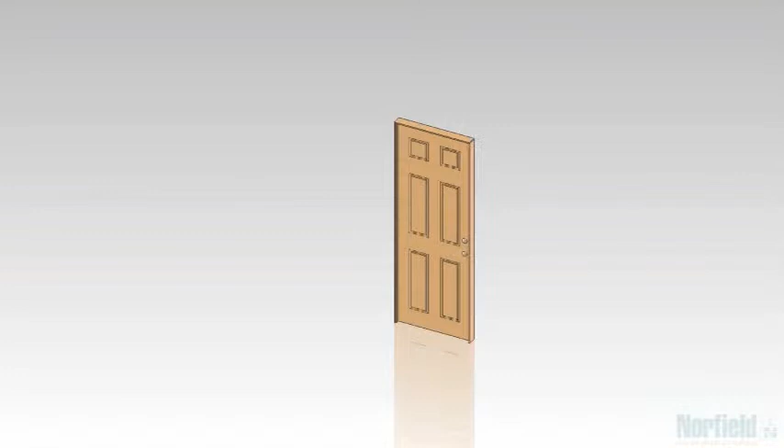To determine the swing of the door, simply face the side of the door with the hinge pin. Note the location of the knob or lock bore. If the knob is to the right, then it is a right-hand door. If the knob is to the left, it is a left-hand door.

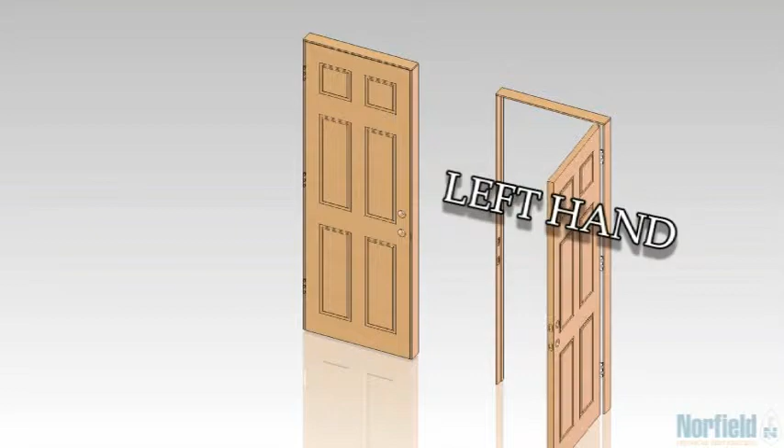The back set is the distance a lock is centered from the front edge of the door. For residential applications, the back set is most commonly 2 3/8 or 2 3/4 inches. For the commercial market, back sets are usually 2 3/4 or 5 inches. Correct back set is necessary to ensure that lock hardware fits the machined door properly.

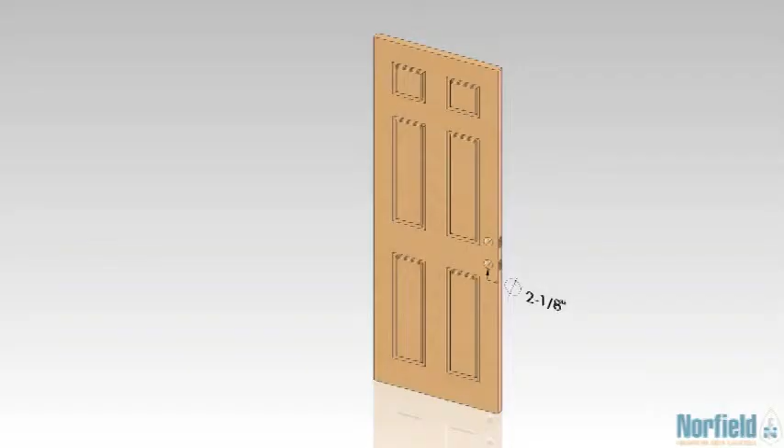Lock bore diameters range in size from 1 3/8 to 2 1/8 inches, with 2 1/8 inches being the most common. Lock height is the distance from the top of the door to the center of the lock bore. For a 6/8 door, the normal lock height is usually 44 or 40 inches. Normal lock height for a 7-foot door is 48 inches. And normal lock height for an 8-foot door is 60 inches.

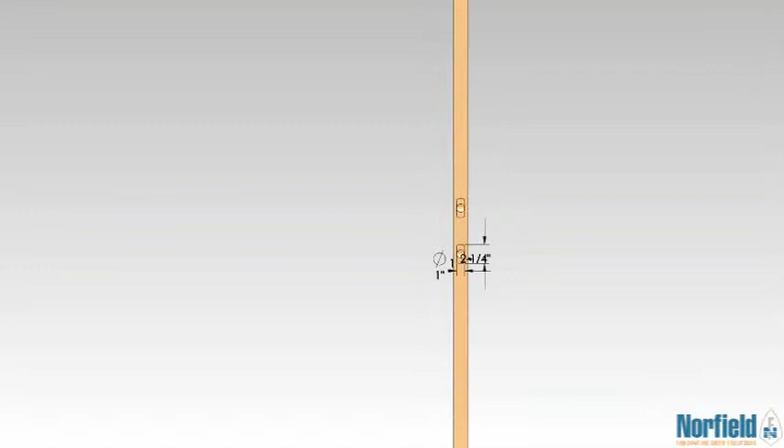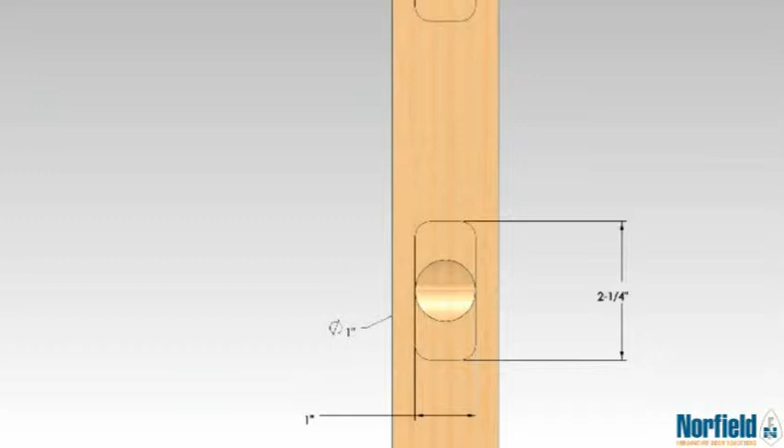The latch bore is a hole drilled through the edge of the door for the latch bolt. It is drilled to the center line of the lock bore and is centered on the edge of the door. Latch bore sizes run from 7/8 to 1 inch diameter, with 1 inch being the most common. The faceplate mortise is a relief on the edge of the door for the latch faceplate. Its width and length will vary with the specific lock hardware used. The most common width and length is 1 inch by 2 1/4 inch.

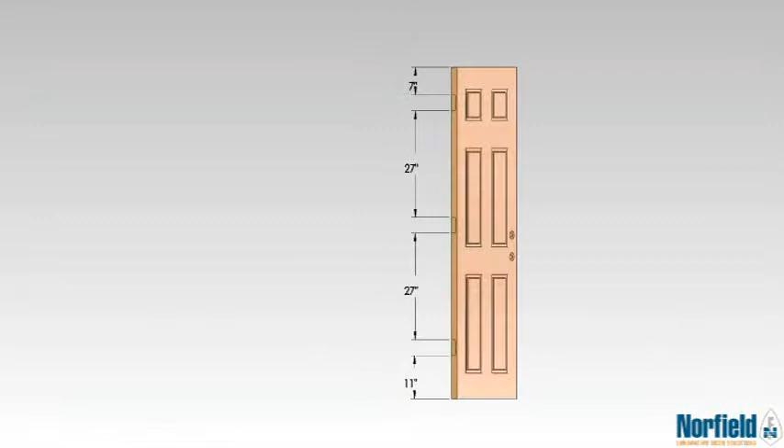The hinge spacing is usually described as a dimension in inches from the top of the door to the top of the top hinge, and from the bottom of the door to the bottom of the bottom hinge. Examples of this are 7/11, 8/8, and 9/9. The center hinge or hinges are most commonly placed with equal spacing between the top and bottom hinges.

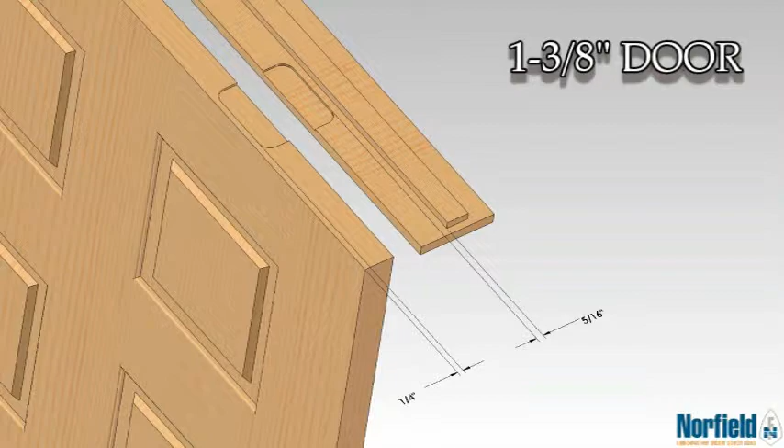Header clearance is the gap between the top of the door and the head jamb when the door is closed. It is usually between 1/16 and 3/16 inch, with 1/8 inch being the most common. For a 1 3/8 inch thick interior door, the mortise is set equal distance into the door and jamb and is typically 1 1/8 inch when using a 3.5 inch hinge. Hinge backset or reveal is the distance from the stop on the jamb to the edge of the hinge mortise, and from the face of the door to the edge of the mortise.

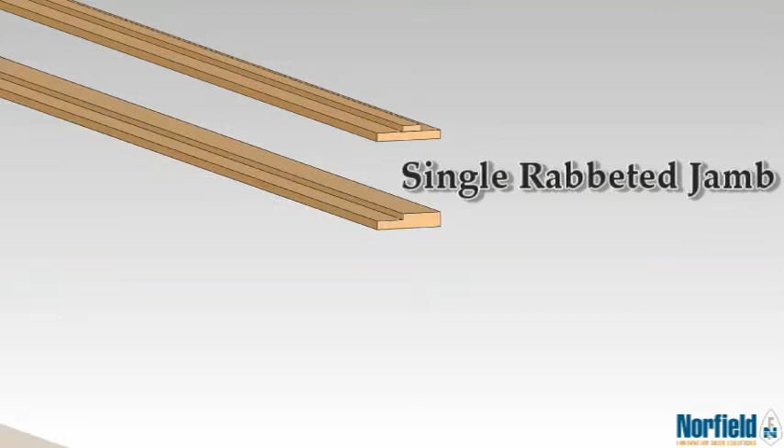In this section, we will discuss the types of jambs. A flat jamb with stop applied, a single rabbeted jamb, a double rabbeted jamb, or a split jamb.

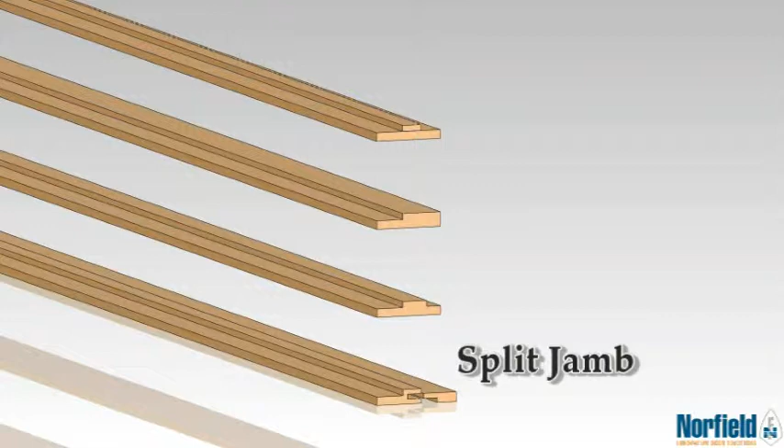Now we will look at how jambs are assembled to form a door frame. A door frame may be assembled with a flat jamb with a mitered stop. If mitered stop material is used, the stop on the side jambs is positioned flush with the dado. The stop on the head jamb is recessed the depth of the dado.

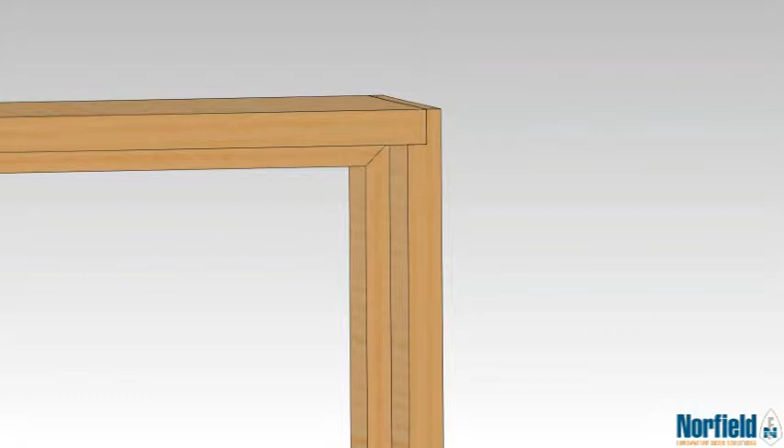Another typical assembly of a door frame is with a flat jamb with a square cut stop. For a flat jamb with a square stop, the stop on the head jamb is recessed the depth of the dado on the side jamb. The stop on the side jamb is recessed the same amount as the thickness of the stop material.

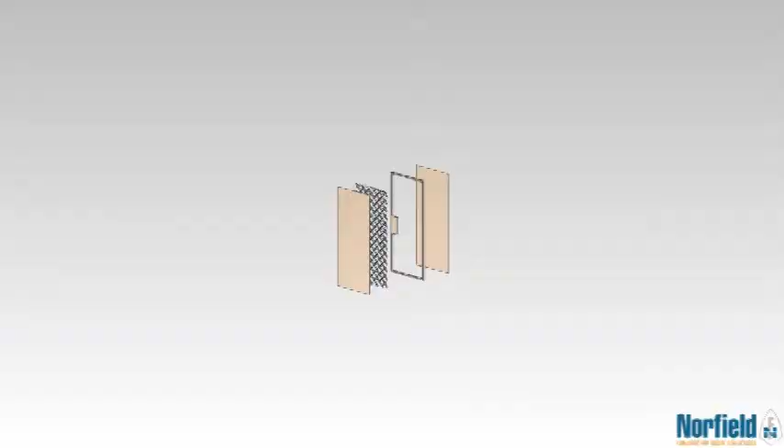There are 3 common styles of doors. Hollow core doors are exclusively used for interior applications. They have a wood frame made up of 2 stiles and 2 rails, a honeycomb cardboard core, and 2 door skins that are usually made from wood veneer or hardboard.

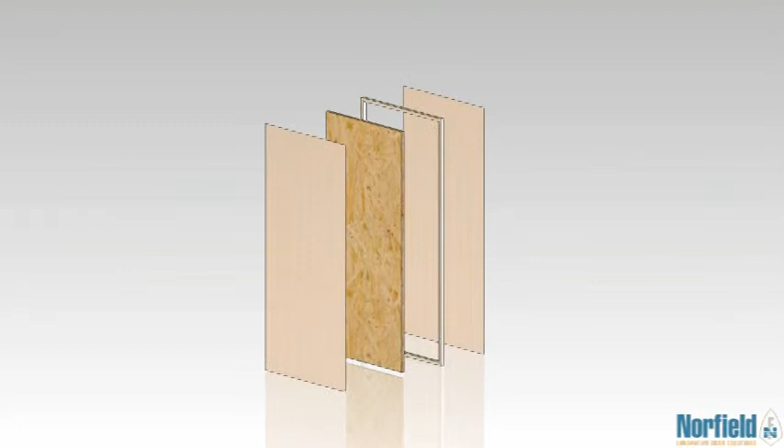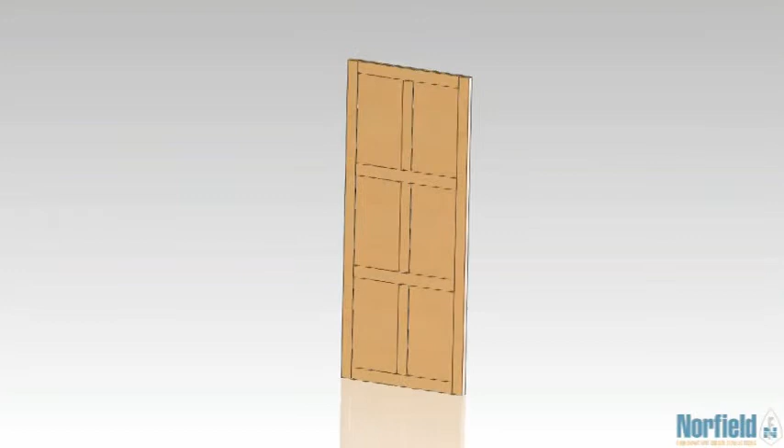Solid core doors are used primarily for exterior entrance doors. The solid core door is constructed similar to the hollow core door. They are made up from a wood frame, a door core usually made from particle board or laminated material, and 2 door skins. A stile and rail door is made up of a number of individual pieces of solid wood that are glued and carefully fit together. Common materials for these doors are Douglas fir, mahogany, and red and white oak.

When a pre-hung door is installed, it is normally trimmed or cased around the edges of the jambs on both the inside and outside of the opening. For interior doors, the trim on both sides of the door is referred to as casing. On exterior doors, the trim on the inside is casing and the trim on the outside is molding. Brick mold is a common exterior molding. Casing and molding are usually mitered where it joins at the top corners.

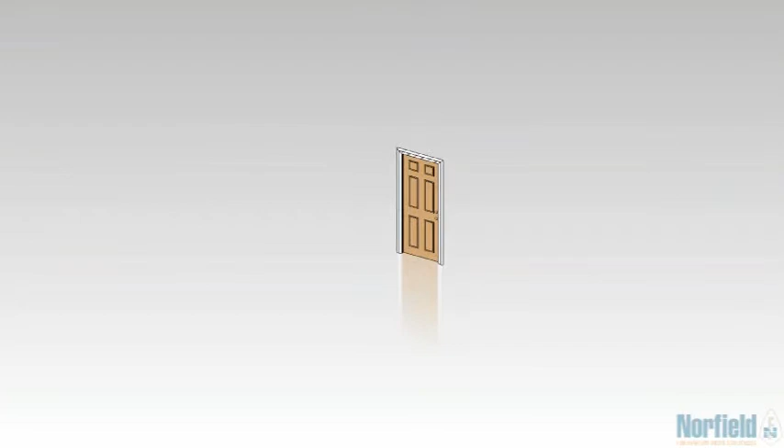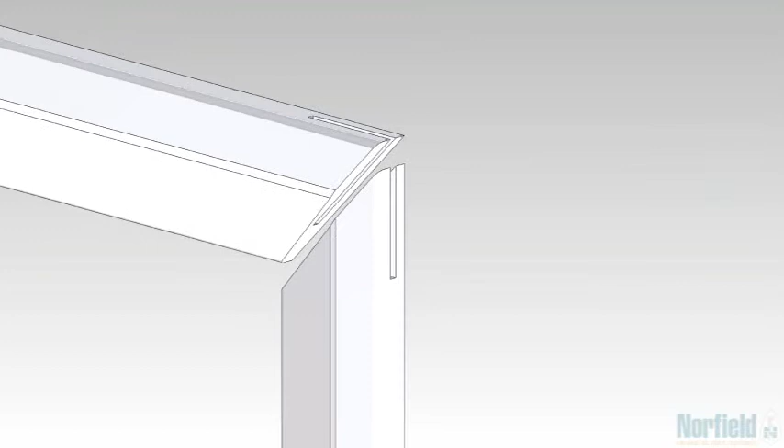When the 3 pieces of casing for one side of a door unit are pre-assembled using either kerfing nails or V-nails, the assembly unit is called a picture frame casing. Casing is sometimes kerfed to attach the head to the side casing. A kerf is a thin slot that is cut into the miter so that a spline nail may be driven into the slot of both the head and side casing to fasten them together.

V-nailing is also a common method for attaching the casing pieces to each other before assembly on the door. This process is usually done with a V-nail machine. It holds, then staples the miter of the head and side casing together.